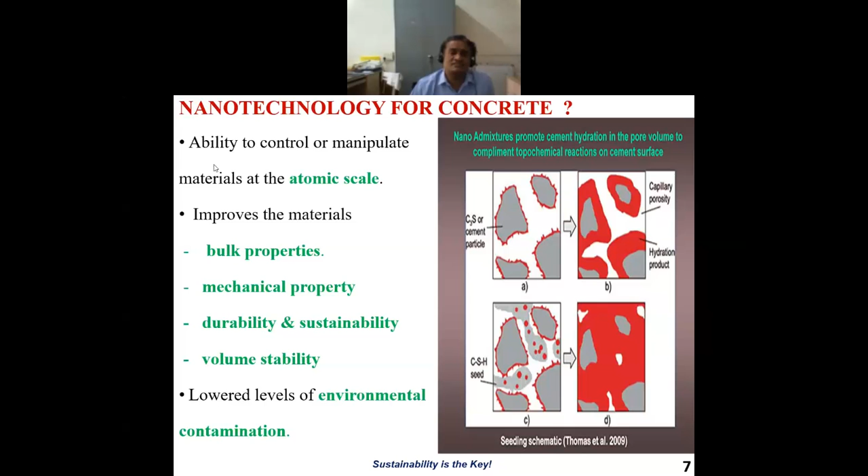There is so much research being reported by several researchers, and there is even simulation. Now this picture you are seeing is a simulated picture. We will come back here, but let us try to understand what it does: the ability to control or manipulate materials at the atomic scale, which normally micron size particles are unable to do.

It improves the bulk properties, mechanical properties, durability, sustainability, and volume stability. Also, there is a lower level of environmental contamination.

How is this happening? Let us see this picture given by Thomas et al., 2009. Now you can see here these are C3S cement particles. Once the water is added and the hydration process started, you can see after complete hydration how the hydration products appear in red color. The gray color is the unreacted cement grains, and the white color is nothing but the porosity, the pores.

So now the same C3S cement grains, let us add some nanoparticles. You can see the small dots are nothing but nanoparticles; a very small quantity of nanoparticles were added to the cement. Now you can see how these...

...nanoparticles are pushing the hydration reaction into a very advanced stage. You can see in the right side picture how the entire area is covered with hydration products, that is calcium silicate hydrate, leaving very little space for pores compared to the previous picture.

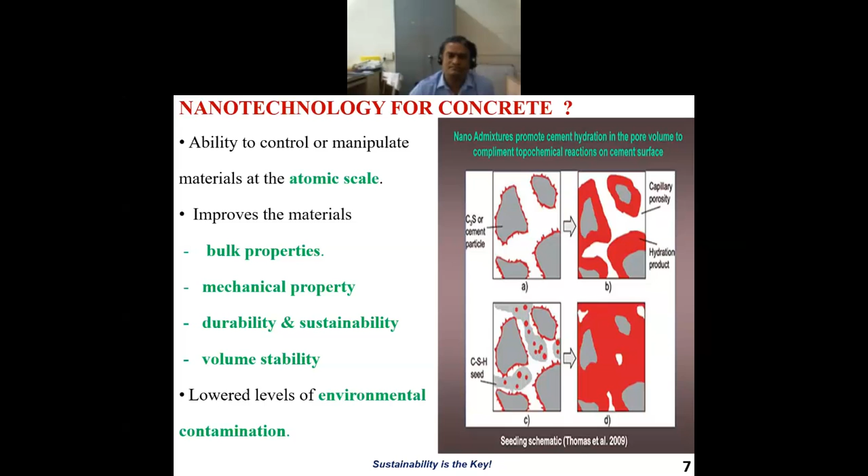Regarding nano SiO2: when we talk about nanoparticles, particularly for civil engineering materials, we know silica-based materials are very good for us. There are so many varieties of nanoparticles: nano SiO2, nano Al2O3, nano Fe2O3, nano TiO2. There are many such products available in the market, and research is being done on so many varieties of nanoparticles.

But nano SiO2 is being widely applied, particularly in cement-based materials. So the first nano product that replaced microsilica or silica fume is the nano SiO2. The nano SiO2 is composed of silicon dioxide as the chief chemical constituent.

Particle size can vary, from 5 to 658 nanometer. From the literature review and research reported by many researchers, we realized some people have used particles as small as 5 nanometer, while others have gone up to 658 nanometer, with spherical morphology.

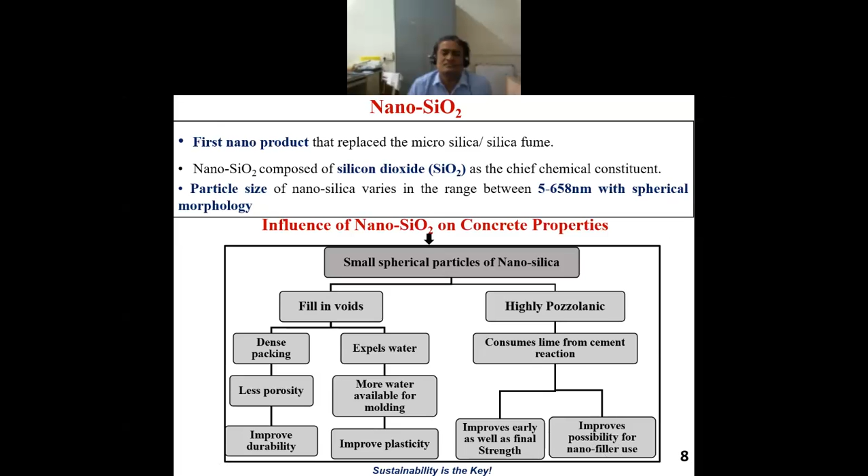Then there are some weaknesses. Every advancement will have a negative side, and similarly the nanoparticles also have some kind of weakness. Now what are the weaknesses?

It induces drying shrinkage, because in the casting stage it consumes more and more water, and then autogenous shrinkage, thereby developing a large number of cracks in concrete. So that is very important. The moment you use nanoparticles, you have to understand that we have to control the shrinkage.

Then, at this point of time, we have seen it is very costly, a non-economical product. Then high heat of hydration, because it advances the hydration reaction, so heat generation is very high, ultimately resulting in slump loss. Nowadays we can manage slump with some kind of superplasticizer, but there are definitely some weaknesses.

So what we realized, what to be done at this point, is to use secondary cementitious materials in conjunction with nanosilica. Possibly you can produce high performance and sustainable concrete, and that is what has happened. So we realized it is difficult to eliminate secondary cementitious materials, as most of them are available free of cost—hardly we are charged for the transportation cost.

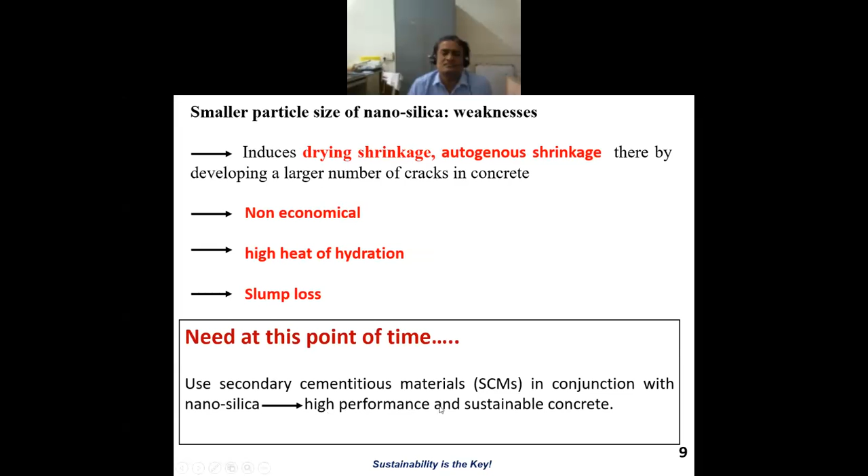Nowadays we are replacing cement with secondary cementitious materials up to 20-25%. It has become common practice, so it is difficult to completely eliminate secondary cementitious materials. Rather, you go for addition of a very small percentage of nanoparticles with a suitable amount of secondary cementitious materials, and that helps in producing a high performance and sustainable concrete. I will talk about this.

So what we have done for this job is proportioned the mixture into different proportions: binary, ternary, and quaternary blends. Selection of the right combination of materials plays a vital role. Thorough knowledge and understanding of the raw materials and basic properties is very much essential. Then choosing suitable combinations of replacement material by adopting a trial and error technique becomes a tedious job.

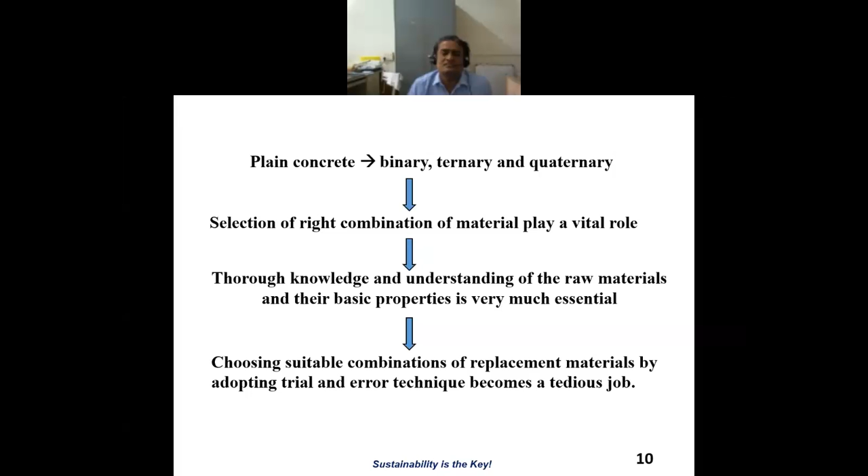So what we realized is, what should be the proportion of nanoparticles that gives an ideal proportion, and what should be the proportion of secondary cementitious materials? We tried so many combinations, but we realized this trial and error approach is a tedious job.

So what we did to overcome this difficulty is adapt the particle packing density concept. The knowledge of particle packing and its influence in this composite is necessary to enable a mixture designer to select the right proportion of replacement materials from a pool of secondary cementitious materials. So I will speak about it.

Now we know what particle packing of concrete is—nothing but the packing density. In soil mechanics, you must have studied that packing density is the volume of solids divided by total volume, that is Vs by Vs plus Vv.

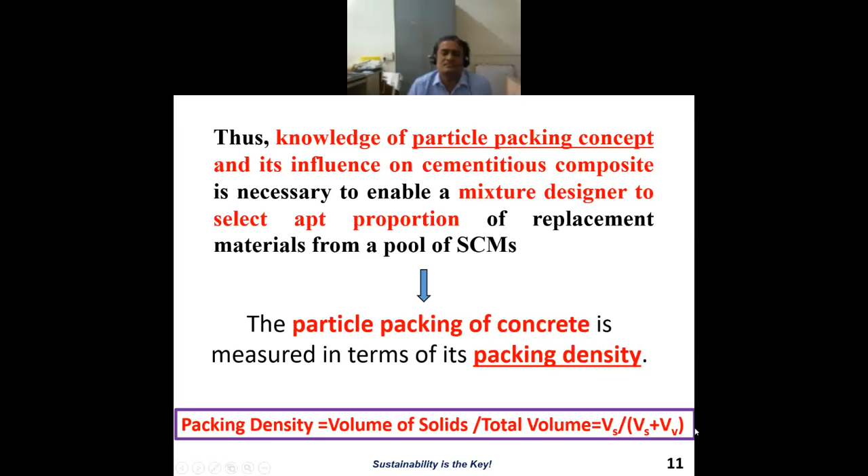So by taking this concept, now you can see what benefit we are going to get. Assume this was my mixture proportion. In this picture, I added some small size fractions so that the pores get minimized. Again, in the last picture, still smaller particles were filled, which helped minimize the pores further.

Now what is the concept actually? The void space between the large particles should be filled by smaller particles, and the void space between these smaller particles is to be filled by further smaller particles, and so on. By doing so, a minimized porosity or increased packing density can be obtained. That is the actual objective of the particle packing model, or particle packing density.

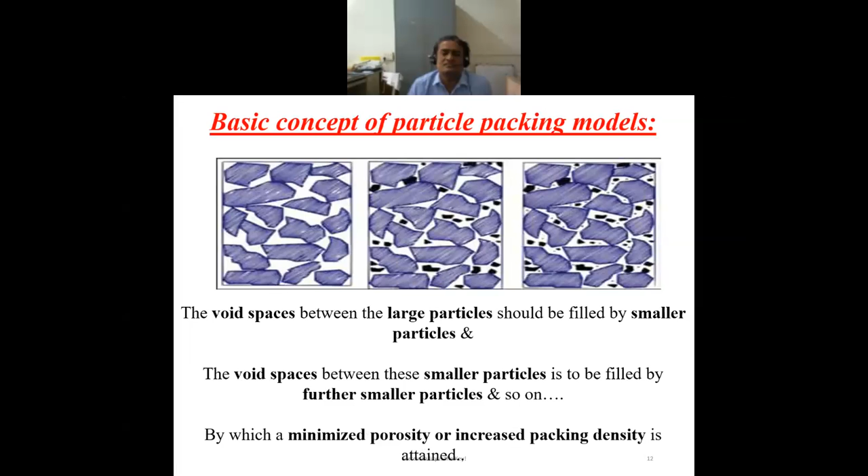Now how will we do it actually? There are so many particle packing models available in the literature. We realized there is a particle packing model given by the modified Andreasen and Andersen model, found to be one of the appropriate and best known packing models. So we have adopted this model for designing the mixture proportion of our material.

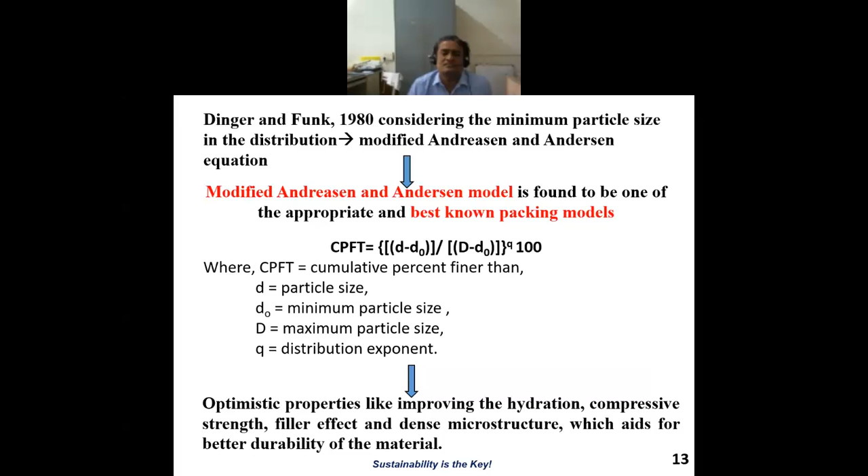So the idea is why we have adopted the particle packing concept, because the utilization of SCMs in conjunction with nanosilica as binary, ternary, and quaternary blends in cement composite is very much essential to counterbalance the effects of secondary cementitious materials and nanosilica, and to obtain high performance sustainable cementitious composites.

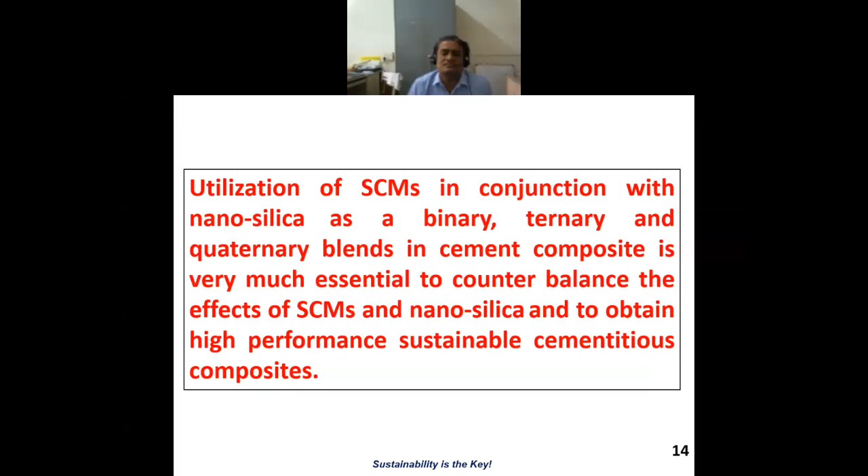Now we know there are some advantages of using secondary cementitious materials, also some disadvantages. Similarly, there are some advantages of using nanosilica, also some disadvantages. So what we have done in this research is combined both these materials, but judiciously combined by adapting particle packing density, so that the negativity of these materials can be minimized, and we will obtain a high performance sustainable cementitious composite. That was the objective.

So let us go into the experimental methodology. Now this is the physical properties of OPC, fine aggregate, fly ash and ultra fine fly ash. All these physical properties you can determine in your labs.

And here is the physical properties of the nanosilica. Now nanosilica we have purchased from one of the labs in Mumbai. It is very costly actually, as I was telling you. And you can see here, this is the particle size distribution of all the materials: the colloidal nanosilica, ultrafine fly ash, ordinary Portland cement, fly ash, and sand.

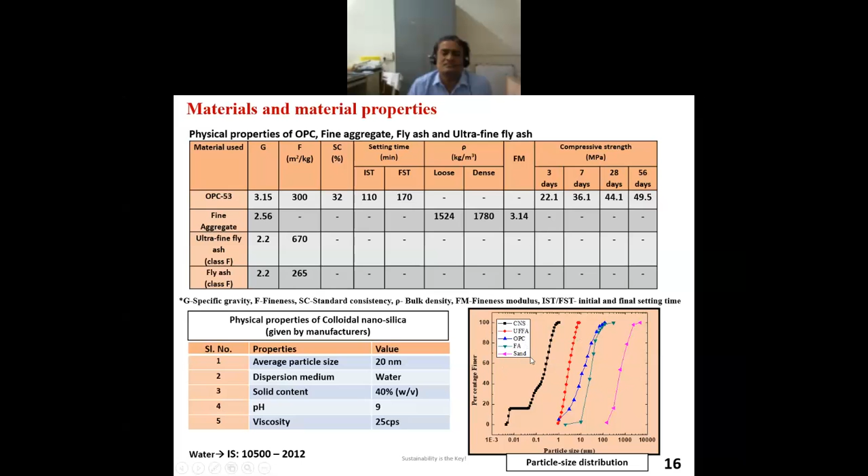So let me expand this picture. You can see here the x-axis representing the particle size and the y-axis representing the percentage finer. Now take a close look into the particle size. This one is representing the sand, which is in the millimeter scale.

Now this is my nanosilica, you can see here it is 0.01 to 0.1 micrometer, so that is nothing but your nanoparticles. And we have also used the ultra fine fly ash, as you can see here, particle size is almost 1 micrometer, a very uniform size particle. And then this is my OPC and this is my fly ash. So the variation is from millimeter to nanometer in the particle size distribution of the materials.

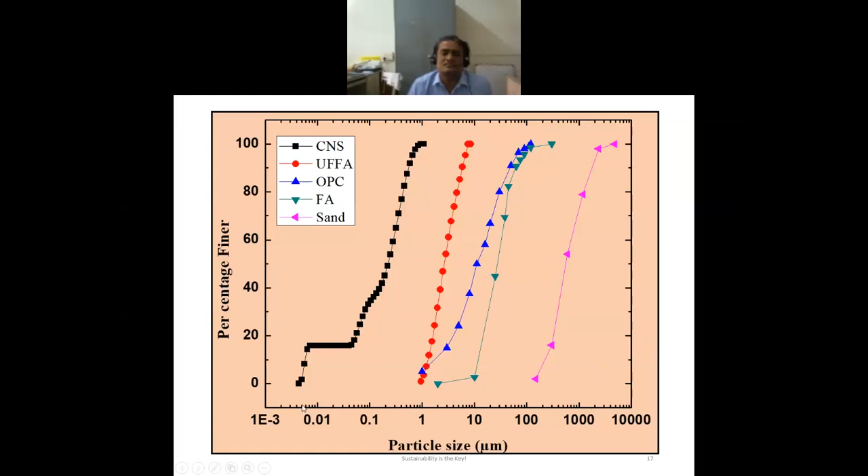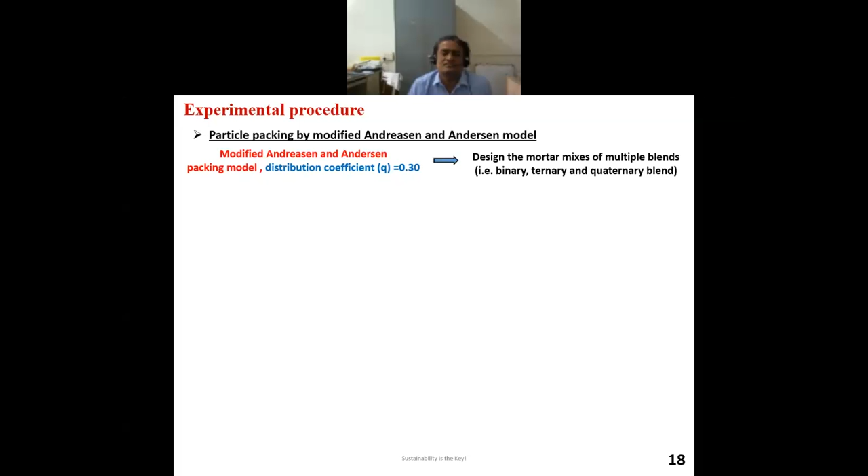Now how we have adapted the particle packing is nothing but the modified Andreasen and Andersen model. As I was telling you, by adapting this, we have proportioned the binary, ternary, and quaternary blends. For this presentation, I have just restricted the presentation till only ternary blends. So you can see here there is a control, that is only OPC, then the binary blend, that is OPC plus fly ash, and OPC plus ultrafine fly ash, and the ternary blend consisting of all three particles, that is OPC, fly ash plus ultrafine fly ash. So that is the way.

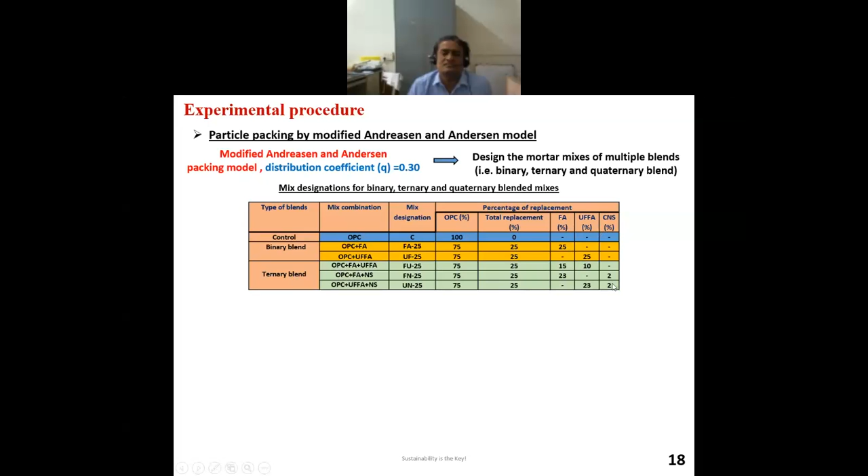And here the percentage replacements, all right, percentage replacements. So for doing this, there is a software called EMMA.

This software helps me design the mixes by adapting the modified Andreasen and Andersen model. First I determined what percentage is found to be best for ultimate particle packing. So for example, with OPC plus ultrafine fly ash and nanosilica, we got 25% total replacement, as we wanted to go for only 25%. Out of 25%, 23 plus 2 gives the best packing density. That's why I adapted 23% ultrafine fly ash and 2% nanosilica.

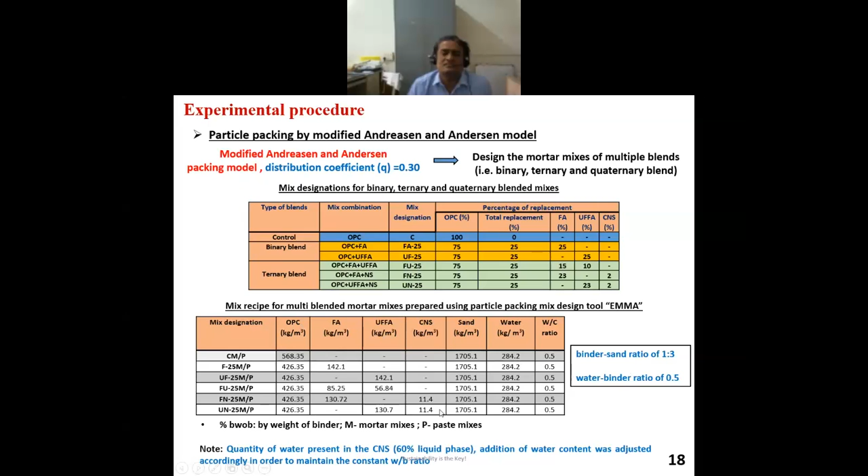This table is nothing but the calculations, showing how many kg per meter cube of mortar is required. We fixed the binder to sand ratio at 1:3, and the water to binder ratio we adapted is 0.5. That's how we determined the quantity per meter cube of the mortar.

Then we actually had two phases for casting. One is preparation of the blended mortar specimens, done with an automatic mortar mixer. The blending was done with this automatic mortar mixer. The mold size for mortar is 70.6 by 70.6, a cubical mold. Compressive strength and porosity were tested using these specimens.

Then we made cylindrical specimens, 100 mm diameter and 50 mm height, for the rapid chloride ion penetration test, that is the RCPT test. After casting, they were stored in humid conditions and demolded after 24-hour storage.

Once demolded after 24 hours, you keep it for proper curing until the day of testing. Normally here we have adopted submerged water curing. Then testing methods for blended cement mortar samples include compressive strength, density, permeable porosity, and RCPT.

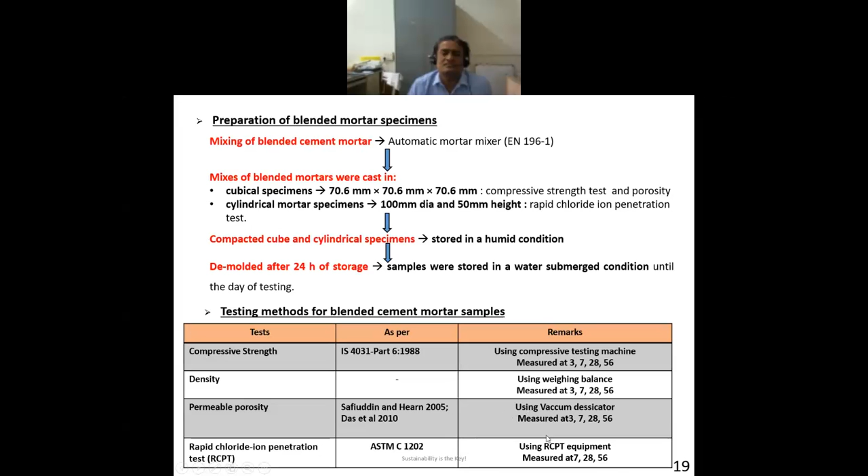As per standards, there are codes we have adapted as references. Compressive strength was tested at 3, 7, 28, 56 days. Same for density, and permeable porosity also the same. RCPT was done at 7, 28, and 56 days.

So you can see here the pictorial representation. This is the mortar mixer, which is an automatic mortar mixer from AIM, which we purchased. Here are the molds, cubical molds, and this is the mold for the rapid chloride ion penetration test.

You can see here the samples with different names. Once demolded, they were kept in curing tanks, and all were submerged. Then this is the testing, for compressive strength, and this is the testing for the rapid chloride ion penetration test.

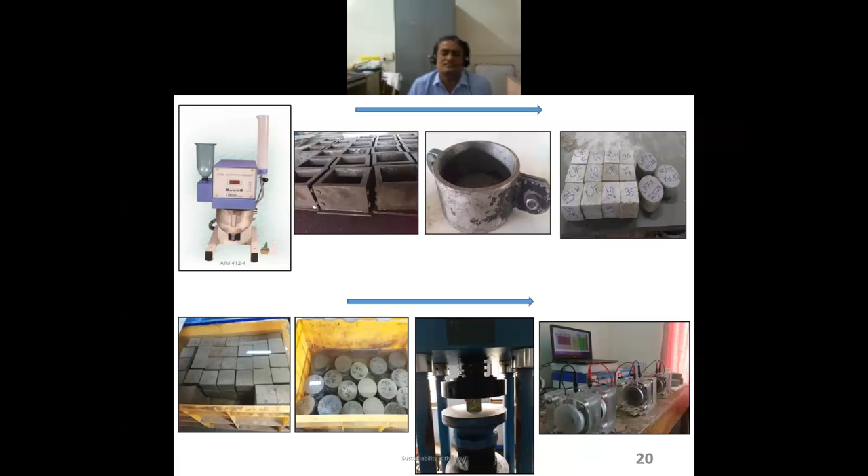Then we also prepared the blended paste specimens. For the paste specimens, we also adapted the automatic mortar mixer, but with a different program, as per EN 196-3.

Now what are the tests we have done? We have done setting time testing, surface temperature variation during the setting period, workability, chemical shrinkage, and advanced characterization of hydrated paste samples.

So you can see here, this is the mold, a typical chocolate mold actually, a silicon mold, and the size is mentioned here. This mold was used for casting the samples for the advanced characterization studies.

The casting was done in the same way. The only thing different was that after the appropriate curing ages, samples were subjected to a solvent exchange technique using isopropyl alcohol for 24 hours.

Because normally when you go for advanced characterization studies, you don't get a slot on that day. Suppose 28-day testing is difficult to get a slot for on exactly 28 days, so we make sure to stop the hydration. There is a technique called the solvent exchange technique, by which you can stop the hydration, and then wherever you get a slot, you go for the advanced characterization.

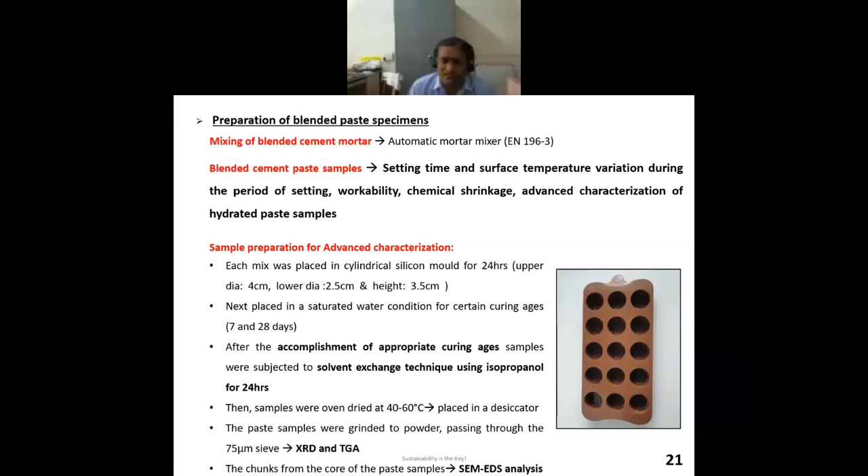Then there are the testing methods for blended paste specimens, cement paste specimens, like setting time - this is standard - and surface temperature. There is no standard actually, but we used the infrared thermometer. The workability, there is a standard, also some reference, that is through the mini flow table.

Then chemical shrinkage through the ASTM standard, and you can see here these are the procedures or the picture representation of how the setting time, surface temperature - just like in the molds and all, they are measuring the same. This is the same equipment actually, an infrared gun, and it measures the temperature. You can see here the mini flow table test measuring the workability, and the last is the chemical shrinkage test apparatus as per ASTM C1608.

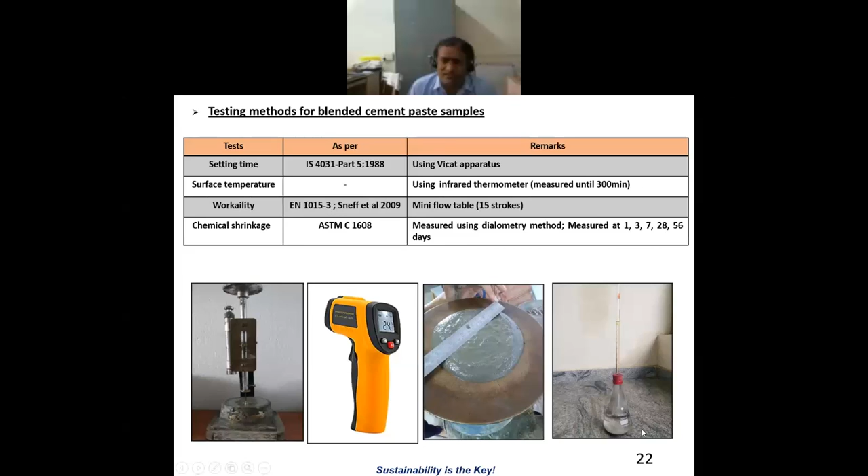Then let us move into the methodology for the advanced characteristics. Now the most important part here is the hydration and microstructure characteristics. My topic, the delivery, tries to understand more into the hydration phenomena - how I am going to quantify the hydration products. That is most important actually. And we have done through the measurement of cement paste with the help of thermogravimetric analysis, or thermogravimetric analyzer.

So this is the standard, like samples are heated within a temperature range of 50 to 900 centigrade, in nitrogen atmosphere, at a heating rate of 10 degrees centigrade per minute. And this is the standard, purge rate of 20 milliliters per minute. That is the equipment requirement.

Now what happens actually - a lot of research scientists have worked on how you determine the calcium hydroxide content through the results of thermogravimetry. So there are equations. You can see here calcium hydroxide converts to CaO plus H2O, and that is the way you determine the CH, that is calcium hydroxide percentage, with this formula given by Singh et al.

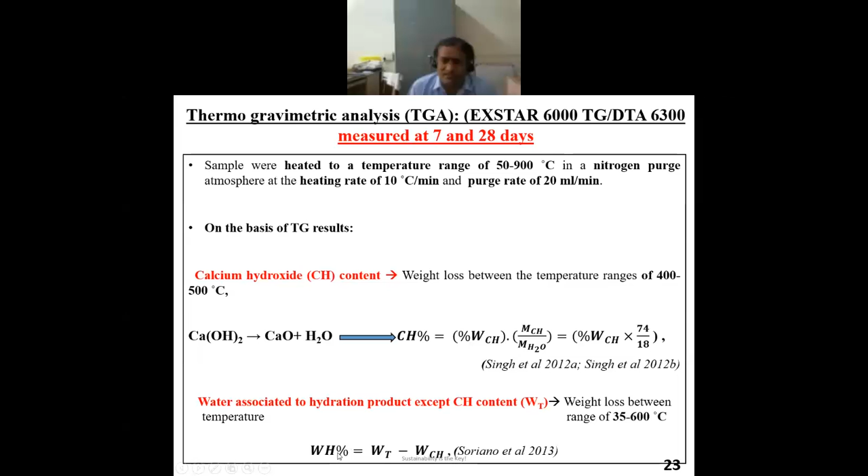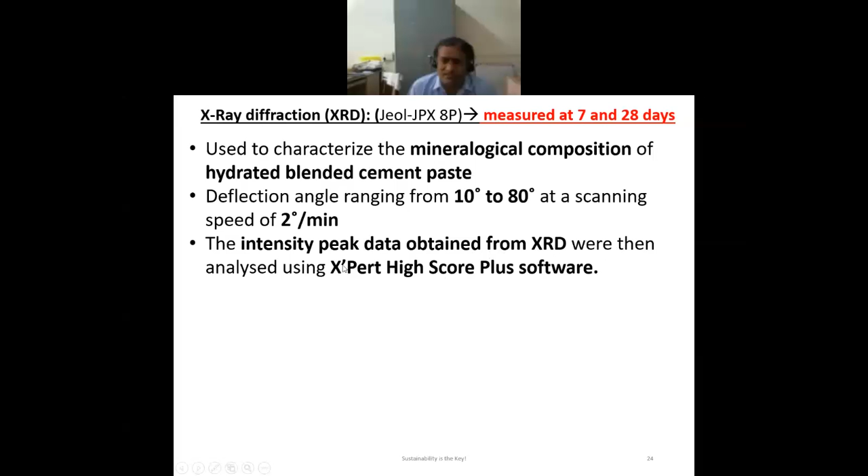Then X-ray diffraction is measured at 7 and 28 days. Now we know X-ray diffraction is for the mineralogical composition of the blended cement paste. So how do we determine it? We determine the intensity peak data obtained from the XRD, and analyze it through the X'Pert HighScore Plus software.

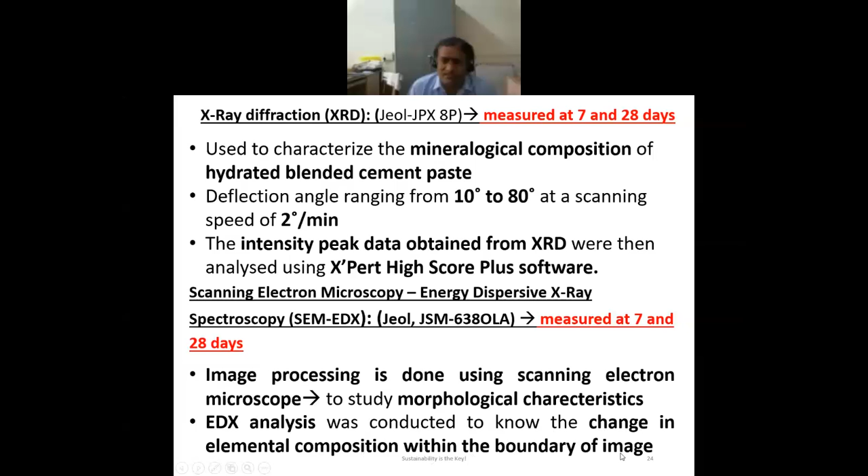Then scanning electron microscopy through energy dispersive X-ray spectroscopy. Now how are we doing this actually? We are doing it through image processing. Image processing will give me the morphological characteristics of the cementitious paste. But when you do EDX, that is energy dispersive X-ray spectroscopy, you are able to determine the change in elemental composition within the boundary of the image, and that is going to help me understand what degree of hydration has happened. So we'll see this in the results and discussion.

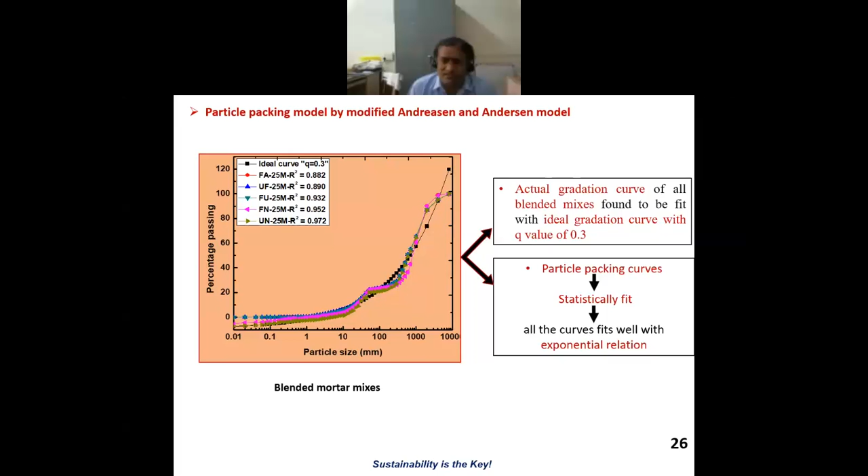Now come to the compressive strength of the blended cement mortar. I have given the notations: cement mortar, fly ash 25, ultrafine fly ash 25, fly ash nanosilica 25, and UN means ultrafine fly ash nanosilica 25. That is the way the mixture is given.

Now you can see here, the black one is the control, and these are the fly ash mixes. What does this show? The moment we replace cement with secondary cementitious materials like fly ash and ultrafine fly ash, there is a problem at early age, and here also we obtained the same kind of behavior. Improvement in strength was noticed for fly ash and ultrafine fly ash mixes only after 28 days, so there was lower compressive strength in the early ages, that is 3 days and 7 days.

Now come to the ternary blended cement mortar. The moment you go for the ternary blended cement mortar, that is fly ash nanosilica 25 percentage, ultrafine fly ash nanosilica 25 percentage, you can see even the early age strength at 3 days increased by 10 percentage and 18 percentage respectively. That is the advantage. The moment you add even a very small percentage of nanosilica, remember we have added only 2 percentage of nanoparticles and 23 percentage of secondary cementitious materials, this very small percentage could able to increase the early age strength significantly.

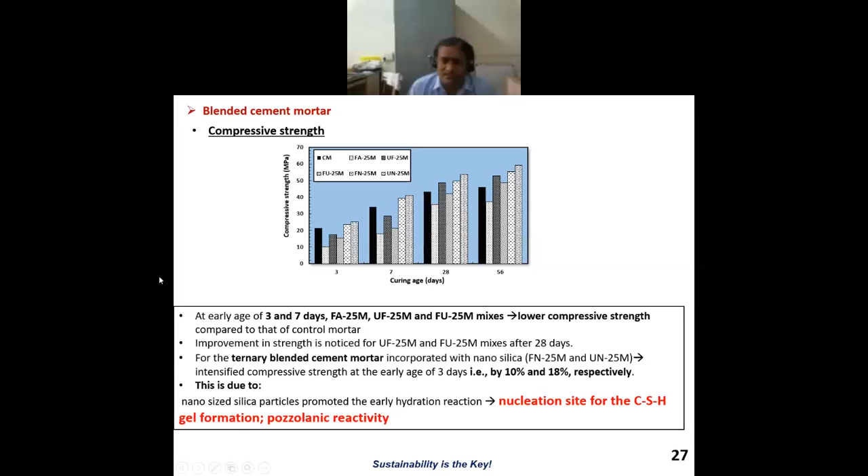Similarly, the density and permeable porosity are plotted. Let us not discuss density, but let us see the permeable porosity, because this is very important for us. Now you can see here that the nanoparticle and ultrafine fly ash combination gives the least porosity. The porosity in the initial stage was almost more than 25 percentage for fly ash mix at 25 percentage, now it is reduced to less than 15 percentage. That is the beauty of adding nanoparticles. Even at a later age, that is 56 days, it was almost 15 percentage, but reduced to close to 5 percentage.

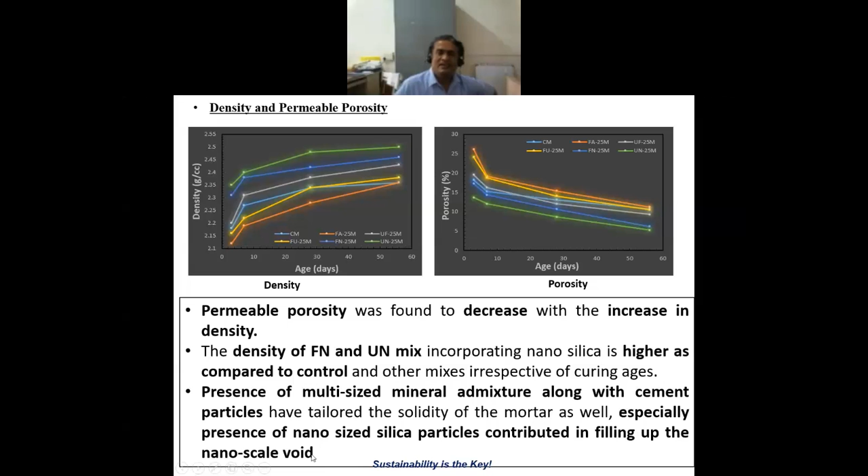That is the significant reduction of permeable porosity. Remember, permeable porosity is the porosity responsible for the permeability of the concrete, and this size porosity is more detrimental. The presence of multi-size mineral admixture along with cement particles has tailored the solidity of the mortar as well. Especially the presence of nano-sized particles contributed to filling of the nanoscale voids, and that is the way it helped in reducing the permeable porosity.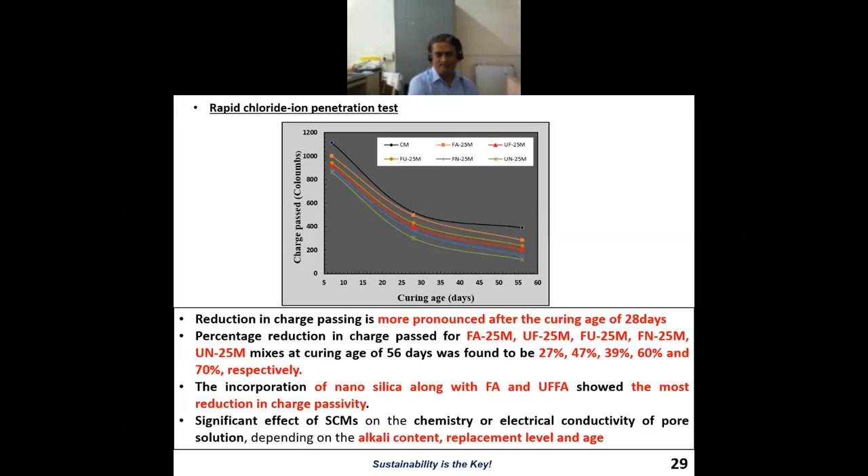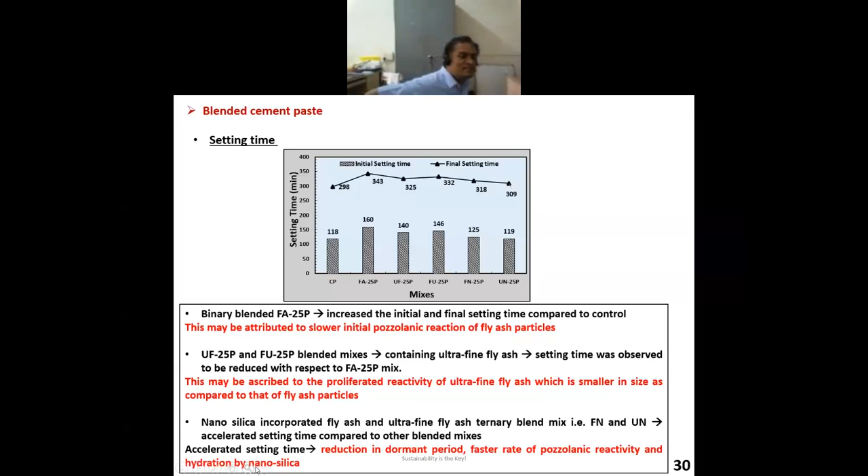Similarly, the final setting time follows the same trend. The binary blended fly ash result is attributed to the slower initial pozzolanic reaction of fly ash particles. But when going with nanosilica combined with fly ash and ultrafine fly ash mix, that is FNUN, it accelerated the setting time compared to other blend mixes - due to reduction in the induction period and faster rate of pozzolanic reactivity and hydration caused by nanosilica.

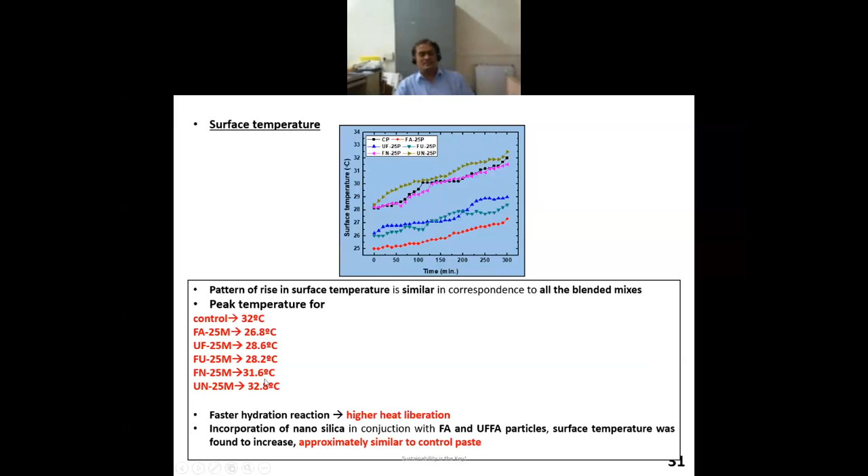The control temperature was 32 degrees centigrade. With fly ash and ultrafine fly ash, this was significantly reduced. When you go with nanoparticles, it comes close to the control, but that is good - my mixes don't have much higher values compared to control, so it stays in a similar range.

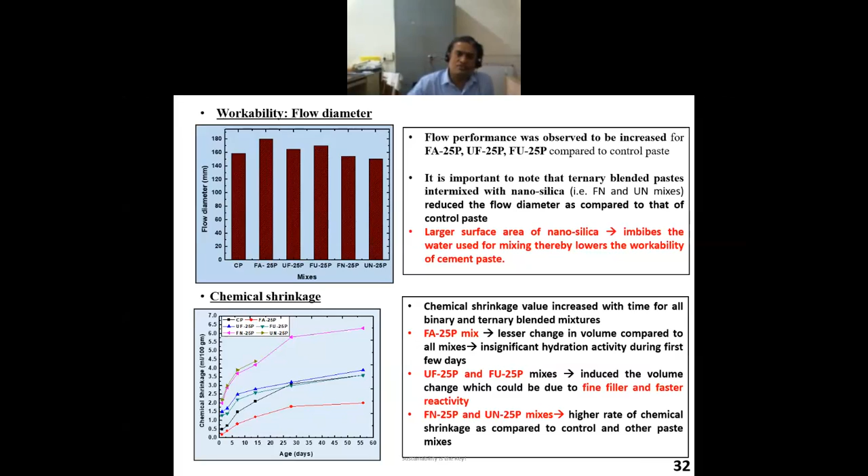So what you have to do? The point here is we have to have adequate quality control practices. Your curing level should be absolutely proper when you deal with nanosilica. Otherwise, you cannot avoid the shrinkage. So to avoid shrinkage, it is necessary to go for adequate quality control practices, meaning we have to give more focus on the curing of the concrete or the cementitious composite.

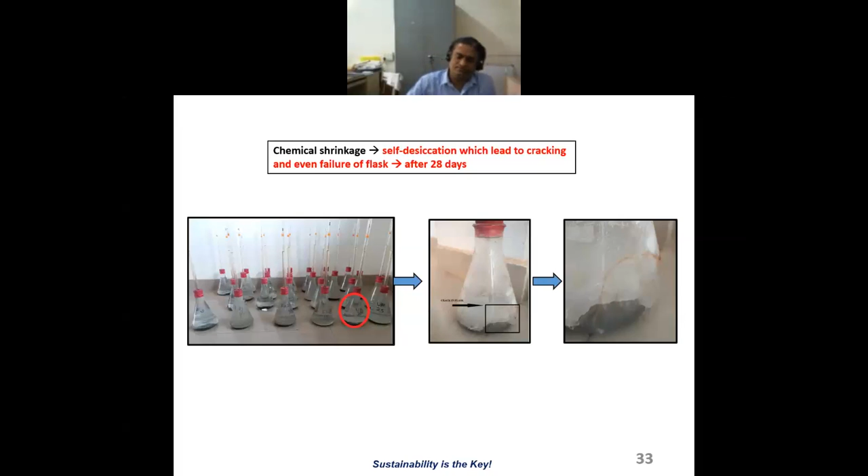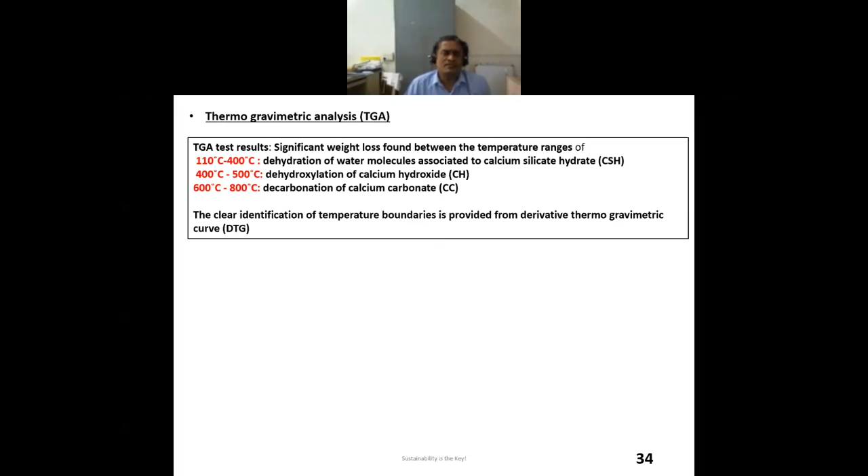Now let us move into the thermogravimetric analysis. How to determine the hydration products is the very key. Now when you go to the TGA, I will explain this, then come to this one.

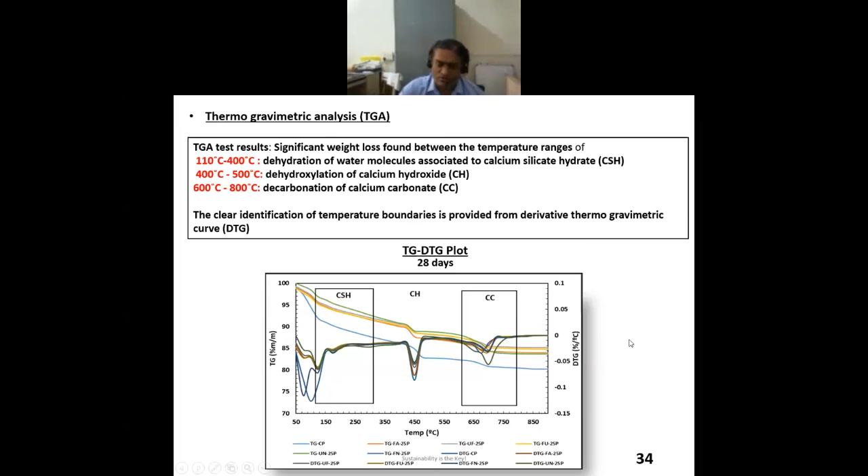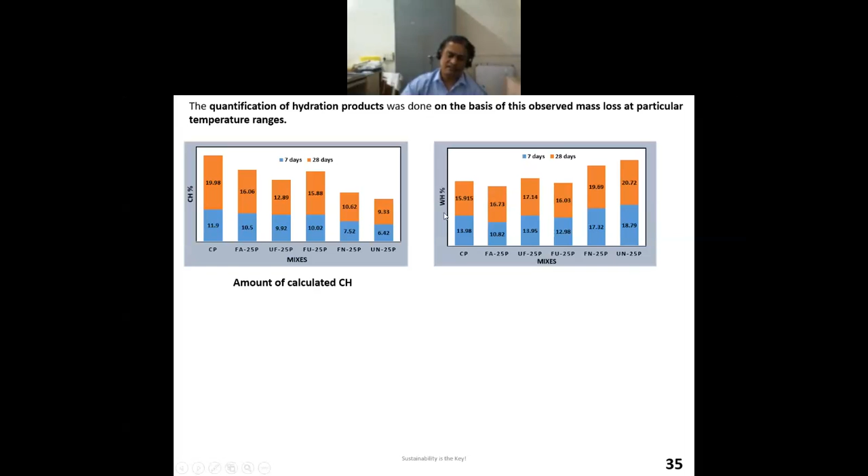But I will show you the determination of calcium hydroxide and calcium silicate hydrate. As I was telling you, by adopting the equations that I discussed in the methodology section, you can determine the percentage of calcium hydroxide and percentage of water related to the hydration products except the calcium hydroxide.

Now you can see here, what is the peculiar histogram here. This is my control mortar, control paste, and here it is my nanoparticle admixed paste, and these are my supplementary cementitious material, that is fly ash and ultrafine fly ash mix. Now try to understand, this is presentation of 7 days and 28 days. So for 28 days, for a control mortar, the percentage of CH was 19.98 percentage.

Okay, now how much it was for a fly ash only mix, 16.06 percentage. Now let us come to the nanoparticle admixed, fly ash nanoparticles. Now it is reducing to 10.62 percentage at the age of 28 days. So that means you are reducing the percentage of calcium hydroxide.

Well, what is the consequence? The reduction of calcium hydroxide is nothing but the reduction of your permeable porosity and the improvement of the durability.

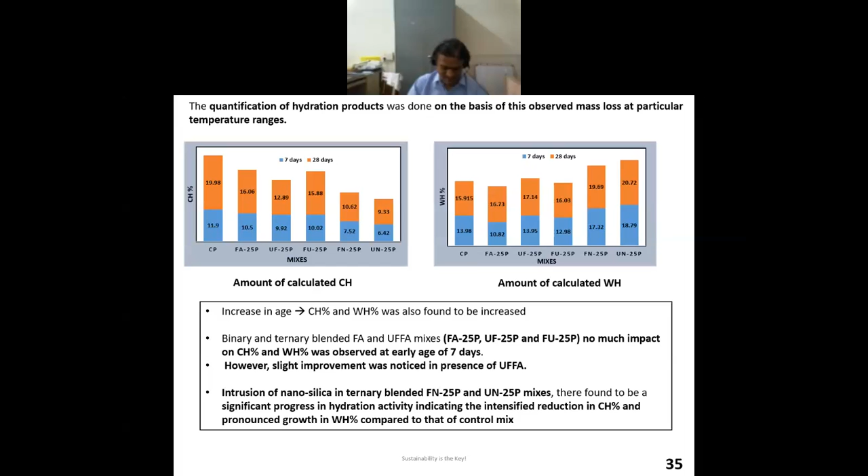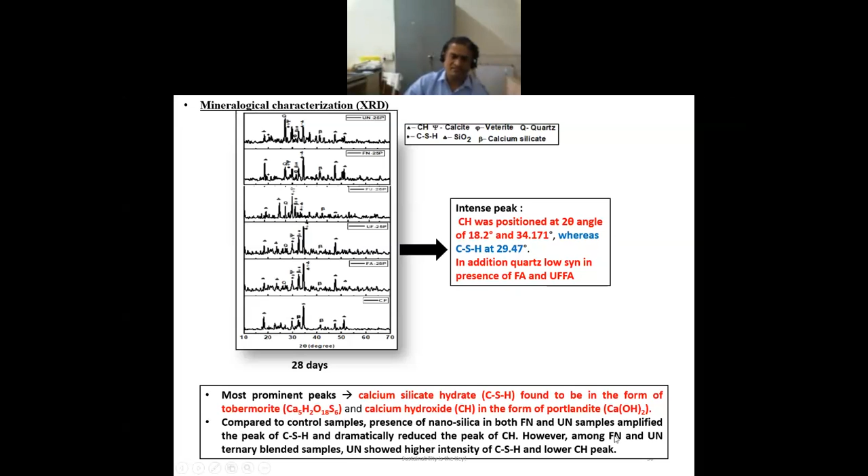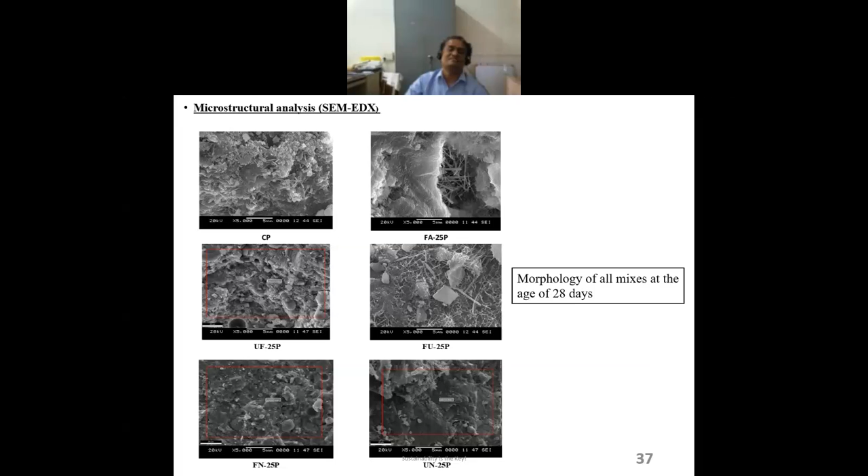So you can see by seeing the picture, the pictures are looking more and more denser. But with these pictures you cannot quantify or differentiate significantly. So that is the reason we go with the energy dispersive X-ray spectroscopy analysis.

For cement composite it is the calcium and silica. So in most cases, if you calculate the atomic ratio of Ca/Si, you can understand what level, comparatively, one cement mix differs from the other cement mix.

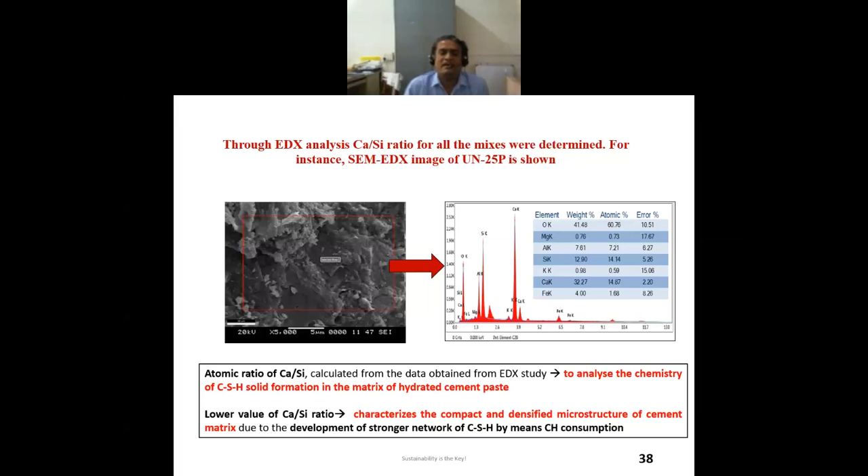A lower value of CA by SI ratio characterizes the compact and densified microstructure of cement matrix, due to the development of a stronger network of CSH by means of CH consumption. The moment CH is consumed, it reacts with additional silica and forms calcium silicate hydrate. More CH consumed means your CA value is lesser, so CA by SI ratio is less, signifying a compact and dense microstructure.

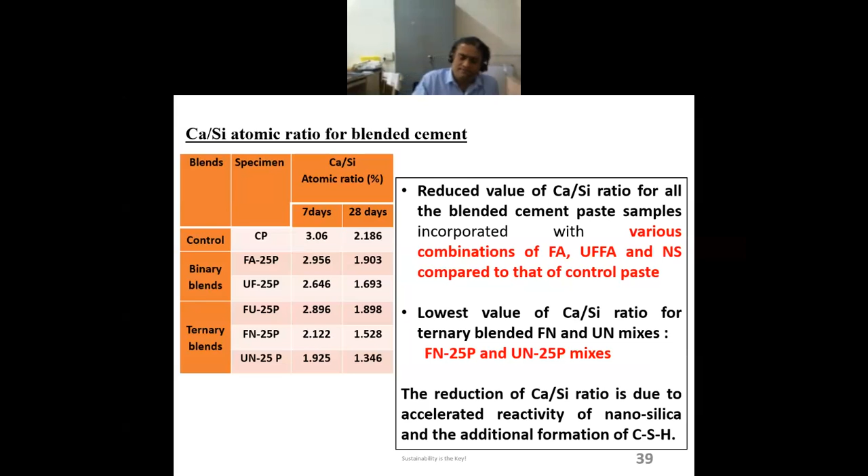The reduction of Ca/Si ratio is due to the accelerated reactivity of nanosilica and the additional formation of calcium silicate hydrate. So with this, I can now move into the conclusion.

So with this, we understand that the ternary blended cementitious mix had an immense effect on the calcium silicate hydrate and CH peak, but the additional CSH peaks are much stronger after 28 days. The CA by SI ratio for ternary blended nanosilica admixed samples at all ages indicates a denser formation of calcium silicate hydrate.

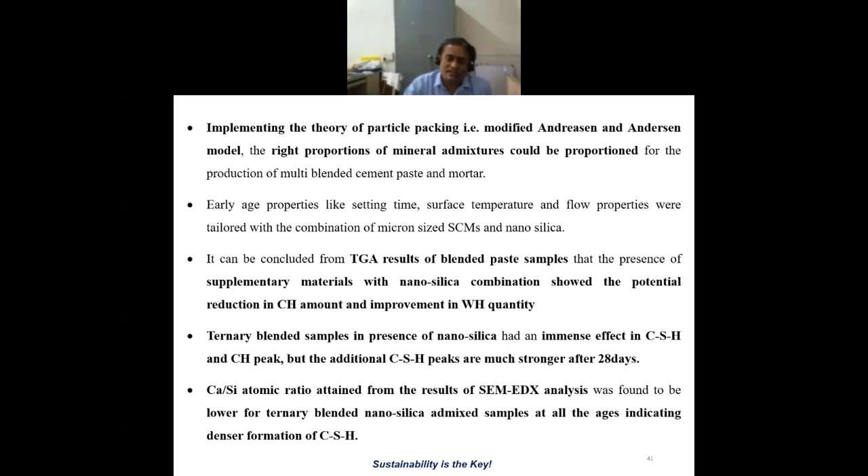That is the way a sustainable mix can be designed even with a very small proportion of nanosilica particles. You don't need to completely replace the secondary cementitious materials — you adapt secondary cementitious materials at a large scale, but by adding a very small percentage of nanoparticles, you can really develop a sustainable cementitious composite. That is the key point in my presentation.

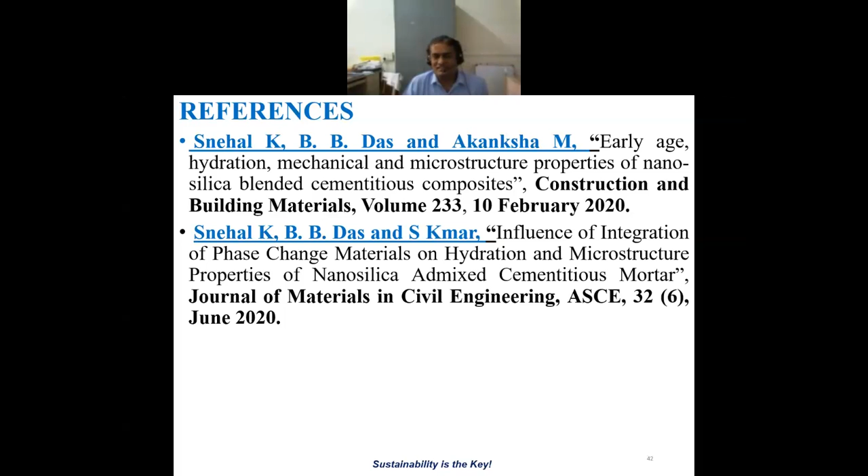So these are the publications. There are so many publications that have come up, I haven't updated them all, but once you go to my website you can see them. The PhD student, Snehal, has published extensively — there are another three papers in very reputed journals. Anyone working in this area can refer to these papers. They also talk about the quaternary blended mix, which I didn't cover, and another material called phase change materials. You can go through it, and if you have any doubts, you can discuss with me.

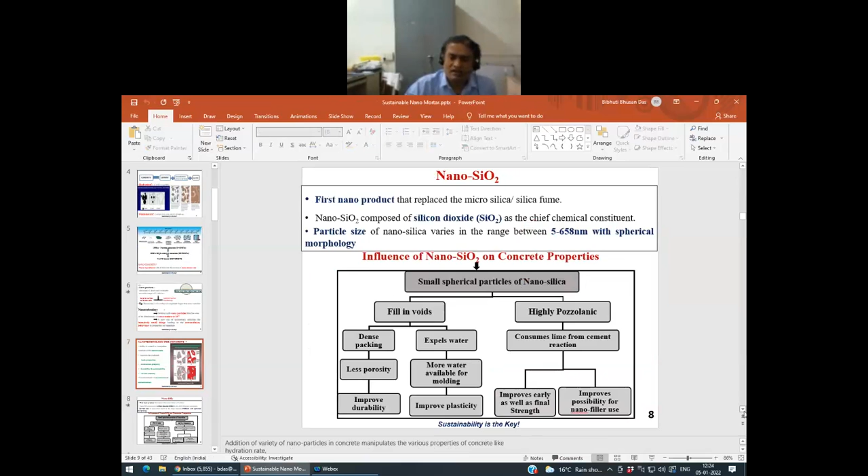Is it clear? Yes sir, thank you sir. There is one more question, yes, please.

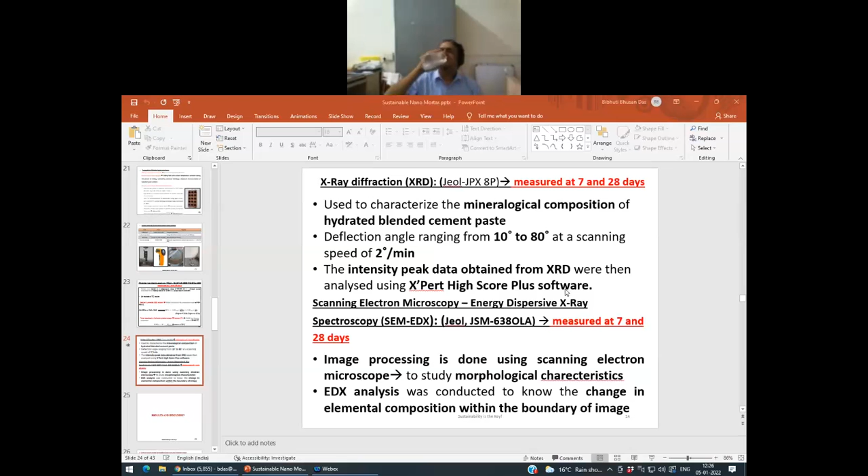Lakshmi Narayan Oja asks: what are the possibilities for nano concrete in practice? That is a very good question actually. Well, as I told you, right now nano concrete has not been adopted by the construction industries, one reason being its high cost.

We know how to maintain adequate quality control, there is no problem for us, we can maintain it. But the biggest challenge, particularly for a developing country like India, and even in many parts of the world, is that it is a very costly material. Suppose per meter cube, concrete you are getting from a ready mix plant is 4 to 5,000; this will increase to 7 to 8,000 per meter cube.

That is the biggest challenge actually for us. Till now, nanotechnology is not being adopted on a wide scale in the construction industry. But remember, with severe climate change and the global warming situation, now we are moving towards more sustainable, more durable material. Now, the moment you go for a durable material, whatever material we are adapting right now is a big challenge for the service life.